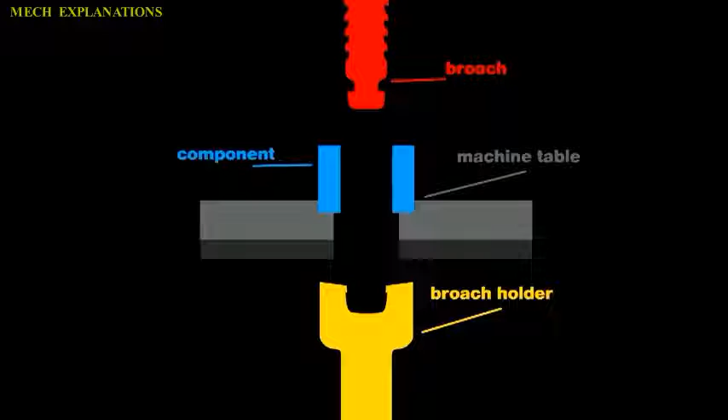Let us learn about broaching. Broaching is a machining process that uses a toothed tool, called a broach, to remove material.

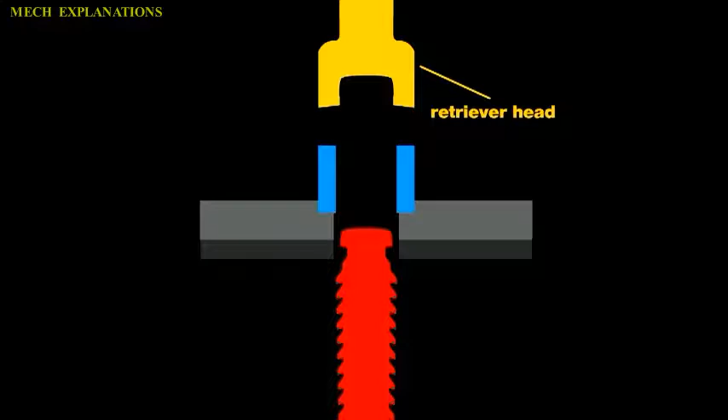There are two main types of broaching, linear and rotary. In linear broaching, which is the more common process, the broach is run linearly against the surface of the workpiece to effect the cut. Linear broaches are used in a broaching machine, which is also sometimes shortened to broach.

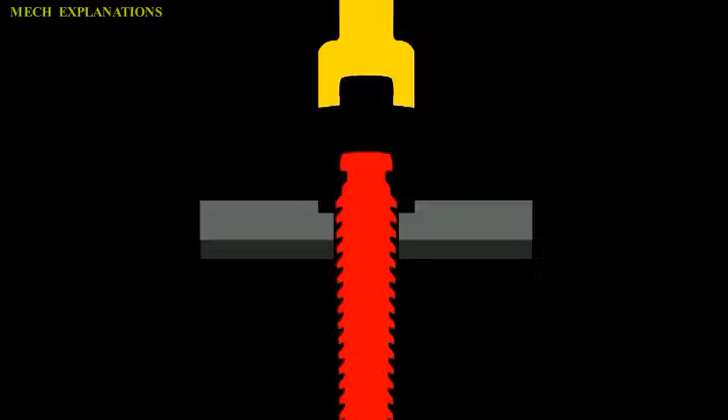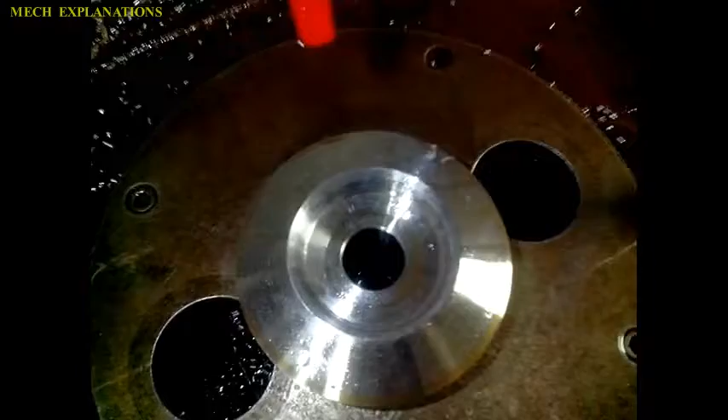In rotary broaching, the broach is rotated and pressed into the workpiece to cut an axisymmetric shape. A rotary broach is used in a lathe or screw machine. In both processes the cut is performed in one pass of the broach, which makes it very efficient.

Broaching is used when precision machining is required, especially for odd shapes. Commonly machined surfaces include circular and non-circular holes, splines, keyways, and flat surfaces. Typical workpieces include small to medium-sized castings, forgings, screw machine parts, and stampings.

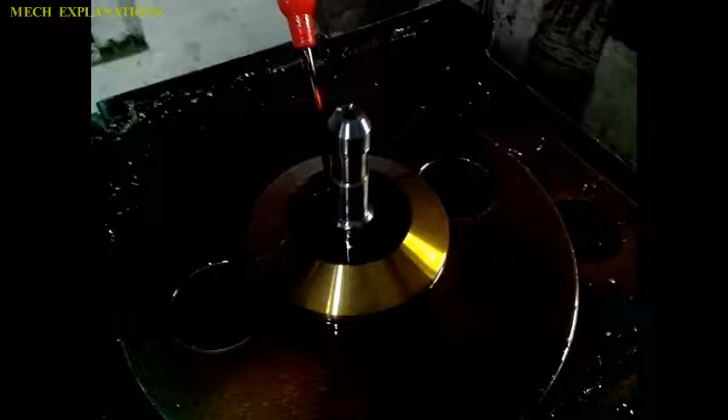Even though broaches can be expensive, broaching is usually favored over other processes when used for high-quantity production runs. Broaches are shaped similar to a saw, except the height of the teeth increases over the length of the tool. Moreover, the broach contains three distinct sections, one for roughing, another for semi-finishing, and the final one for finishing.

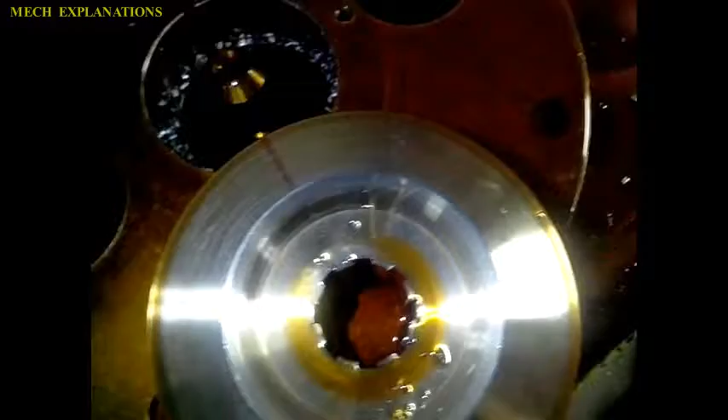Broaching is an unusual machining process because it has the feed built into the tool. The profile of the machined surface is always the inverse of the profile of the broach. The rise per tooth, RPT, also known as the step or feed per tooth, determines the amount of material removed and the size of the chip.

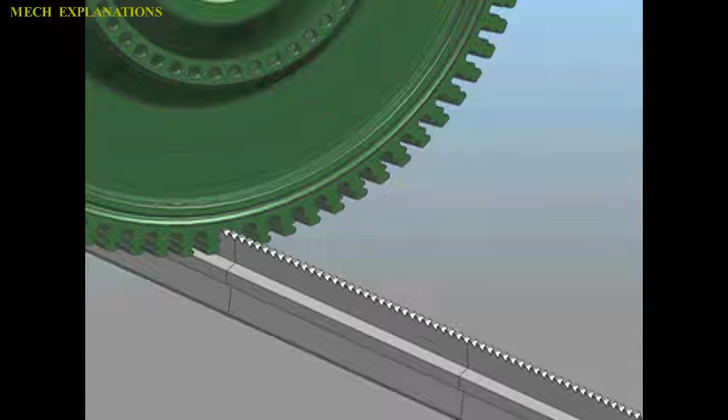The broach can be moved relative to the workpiece or vice versa. Because all of the features are built into the broach, no complex motion or skilled labor is required to use it. A broach is effectively a collection of single-point cutting tools arrayed in sequence, cutting one after the other. Its cut is analogous to multiple passes of a shaper.